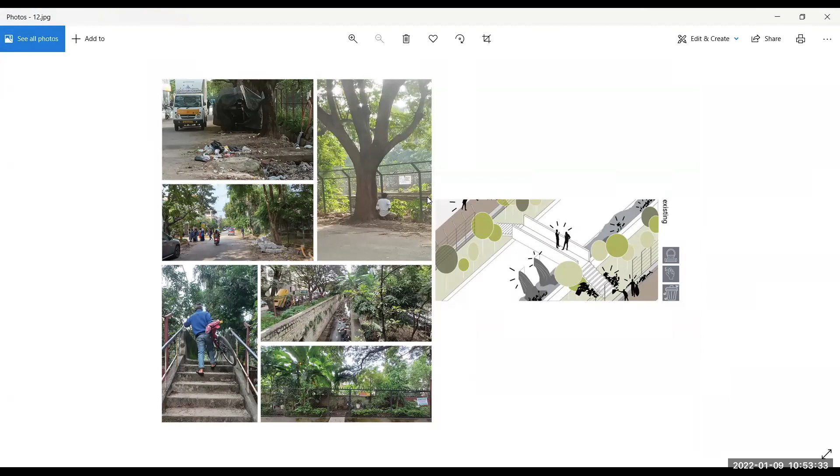So what we propose is a framework of interventions which aim for a social, ecological, and safe eighth main.

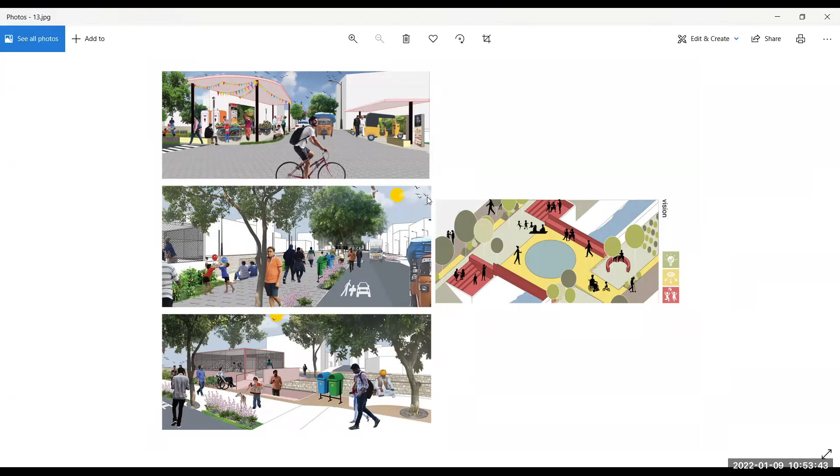We catalog the interventions under three headings: a socially vibrant, inclusive, and recreational spine; an ecological and resilient spine; and a safe, clean, and organized spine.

Each of these proposals is listed through the time taken for setting them up, the cost for setting them up, and the maintenance required for the proposal to function as a whole.

Under the first heading, we have a set of proposals which aim for a socially inclusive and recreational spine. These align with SDGs 3 and 11.

We present each of these sets of proposals in view of how they align with the Sustainable Development Goals of the UN.

What we thought was that a good place is created through habituation of the place.

Our first proposal is events like worldwide car-free events, which are being carried out in many places. These events can happen possibly once a week regularly, so a part of the street can be blocked off.

We can have residents of the surroundings take over the street and use it for their recreational purposes. Another set of events could be screening events.

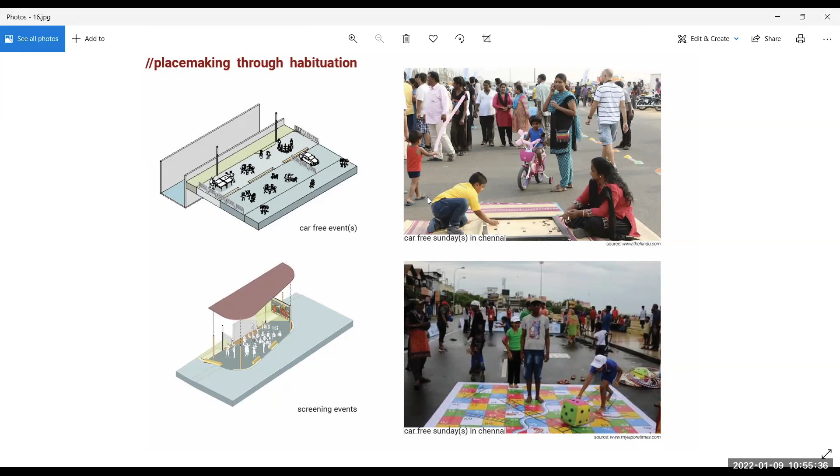Bangaloreans are huge RCB fanatics, so IPL screenings could take place, and other football Premier League matches could be screened too. Habituation is used as a tool for placemaking, and that's our first primary idea.

This is placemaking through social production. We preserve the buffer as such in our proposal, envisioning it as community gardens which can be used as a tool for social production. That's one main proposal.

What we observed during our initial site study was that the surroundings were slightly socially loose, so we use community gardens as a tool for improving the social cohesion of the neighborhood.

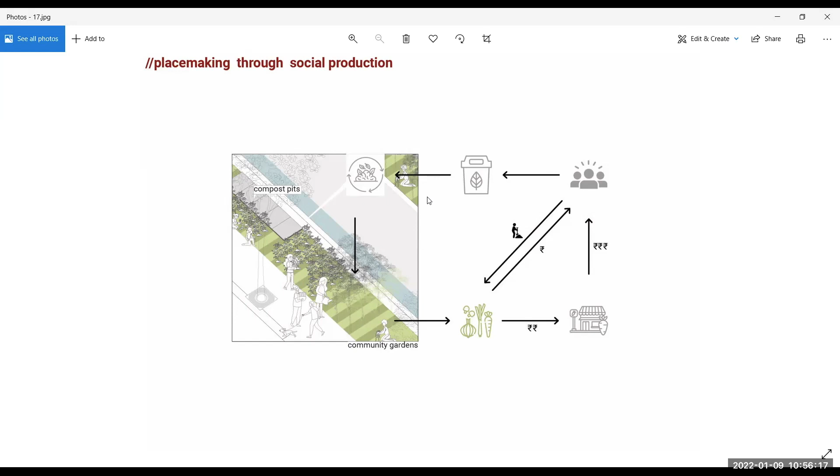Apart from that, people can also be engaged with food production, and the gap between urban areas and food production can be reduced.

One of our analysis parts was coming up with a safety map of the site, developed through on-site observations and community engagement, thanks to the organizers.

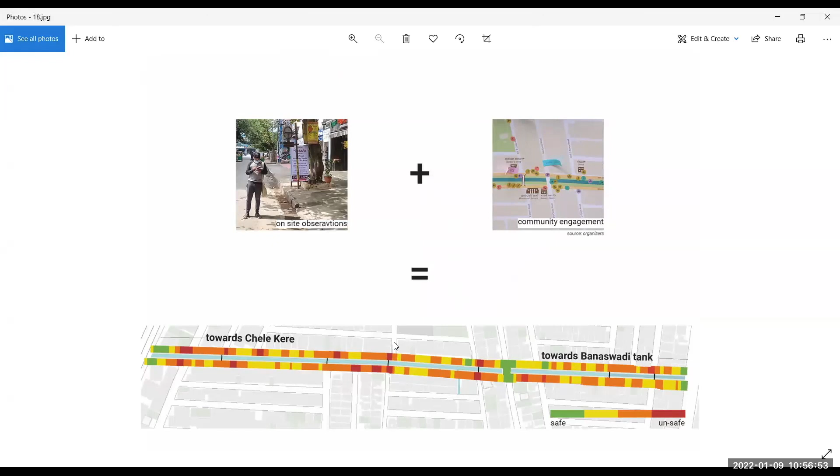Through these studies, we came up with a conclusion that these red spots, which are unsafe according to our map, turned out to be spots where the cross street and the eighth main meet.

These unsafe spots also include the pedestrian bridges which cut across the Raja Kaluve. So we intervened in these spots, doing surgical interventions.

First, we envisioned pocket parks along these junctions of the cross streets and the eighth main. These could be easily implementable, economical interventions, which are a first step towards space making in the surroundings.

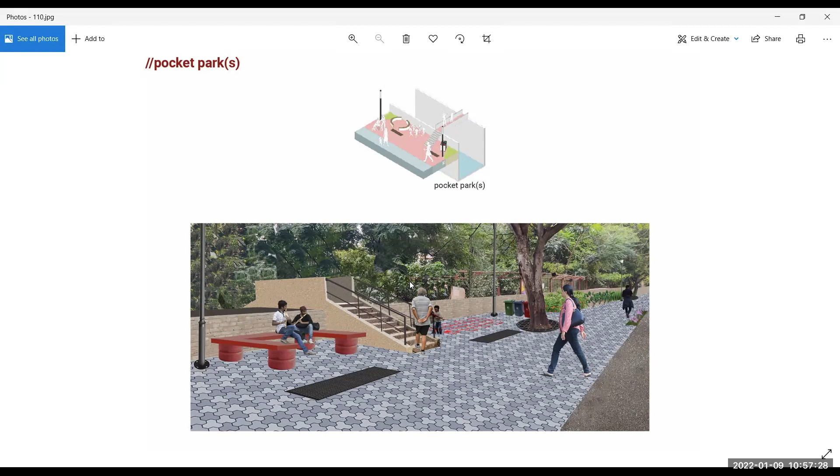This negates the negative character of the surrounding to a certain extent.

A more long-term and cost-intensive proposal was platforms for play. These are platforms which aim for inclusive recreation.

It has everyone in mind, so it is for each of the residents, each of the stakeholders.

To negate the negative character of the existing pedestrian bridges, we expanded the area of the pedestrian bridges to make it a place for the people, and we pushed them down to ground level so it's easily accessible by the neighborhood.

This is a view of one of the play platforms.

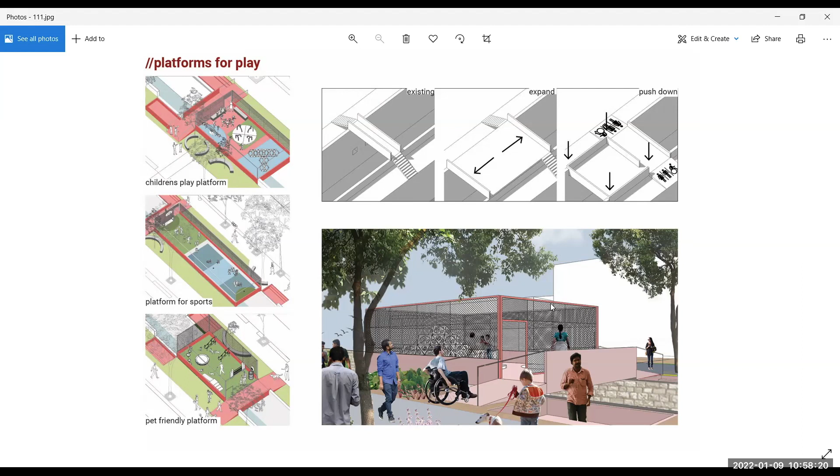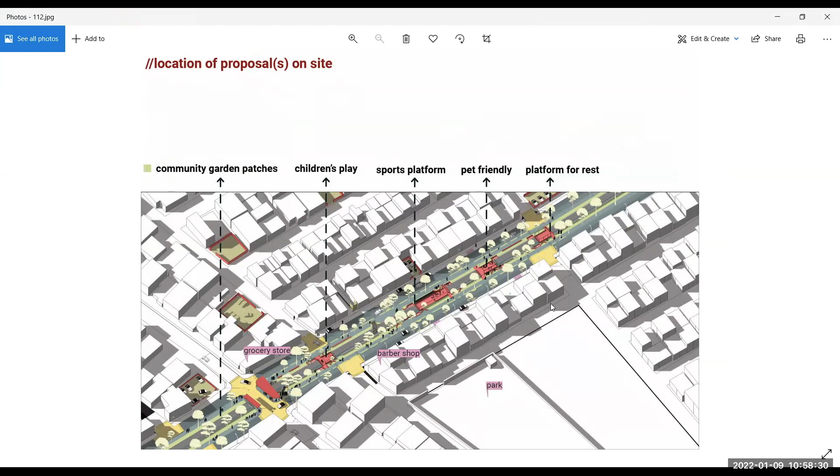Another proposal was a framework for an elastic eighth main. This reflects the temporal character of the pedestrians which was observed. There is not a constant flow of pedestrians; there are peaks of pedestrian activity during different times of the day. So the proposed road section reclaims a part of the existing carriageway.

During the peak pedestrian hours, residents can take over the street, so they can use that part of the road. Whereas during normal usage, vehicular movement dominates.

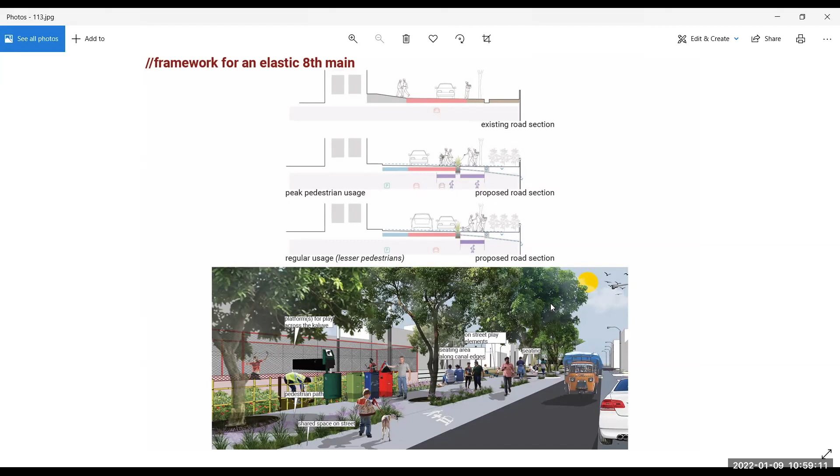These are proposals for an ecological and resilient spine. These align with SDG 6 and 15.

Our first proposal is retrofitting the canal. One major complaint from the residents was the canal being a constant discharge of sewage, so we used a set of nature-based solutions which remediated these issues.

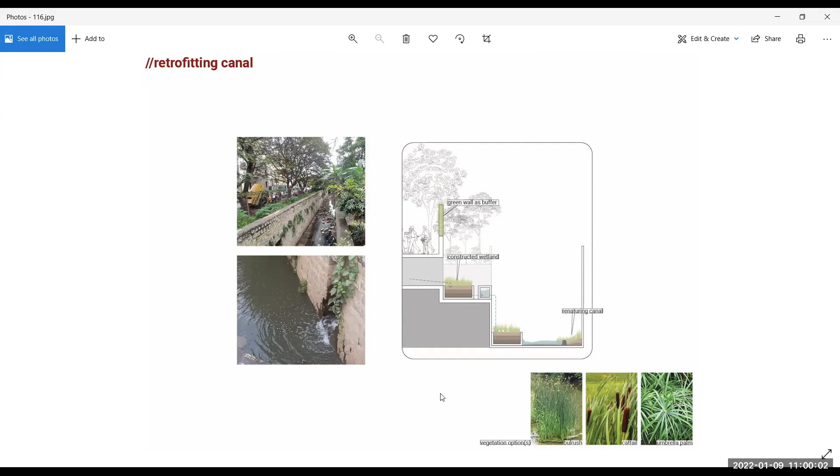This is a particular part in the detailed site where we are using a kind of stepped wetland to actually filter the incoming grey water. These are certain vegetation options for the wetlands. So next was retrofitting the stormwater drains.

These aimed at two things: one is retrofitting the stormwater drains in the cross streets, which were ill-maintained, and also retrofitting along the 8th main. So these provide proper access ways for stormwater drains to actually reach the Raja Kalve.

One issue which always happens is non-point source pollution with stormwater. Retrofitting them with bioswales helps in remediating this. Using native species of plants helps in long-lasting and low-maintenance bioswales.

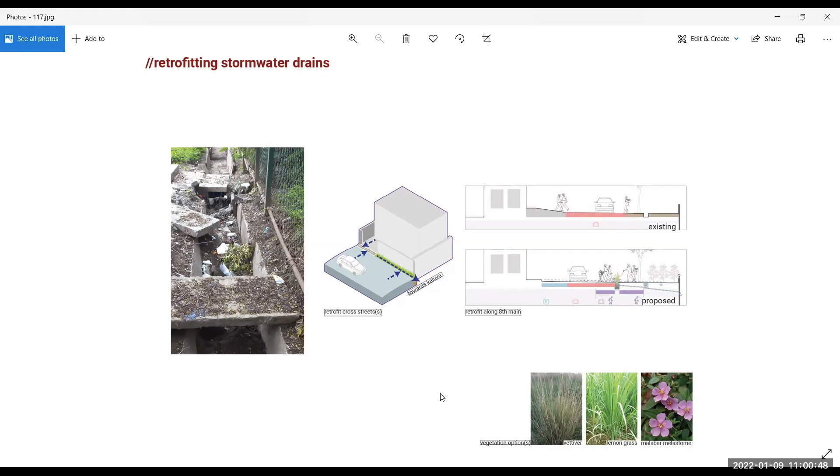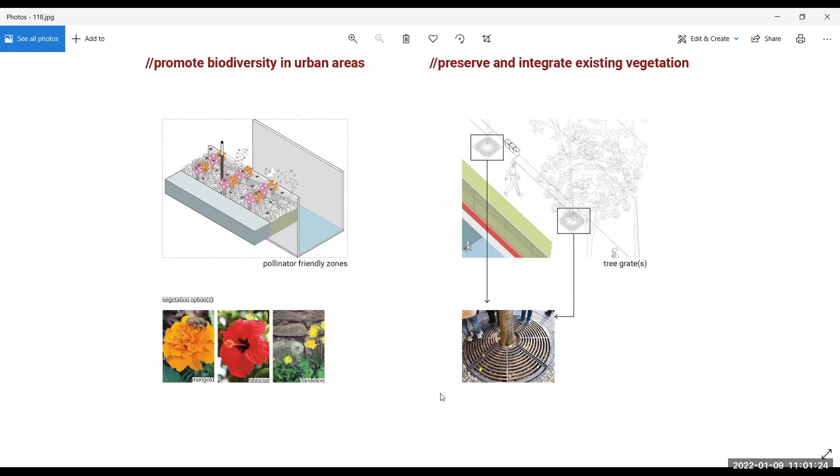Bangalore, and the Bangalore city area, is one victim of rapid urbanization. So to tackle that and promote biodiversity in urban areas, one of the proposals was a pollinator-friendly zone along the buffer area adjoining the Raja Kalve, and preserving and integrating the existing vegetation along with the larger frame of the proposal is another aim.

The locations of proposals. So the last set of proposals is towards a safe, clean, and organized spine, and these align with a certain set of SDGs: 3, 11, and 6.

One major stakeholder to be considered in retrofitting the Banaswadi site was the street vendors. Street vendors basically work on the basis of visual and access immediacy, so zoning them in the junction next to the grocery store was one proposal.

Retrofitting the junction to help provide them with proper vending spaces, and also accommodating the auto rickshaw stand, was one major proposal.

Vending doesn't happen throughout the day; it's a temporal activity. So giving provisions for accommodating other events post vending hours was also a major proposal.

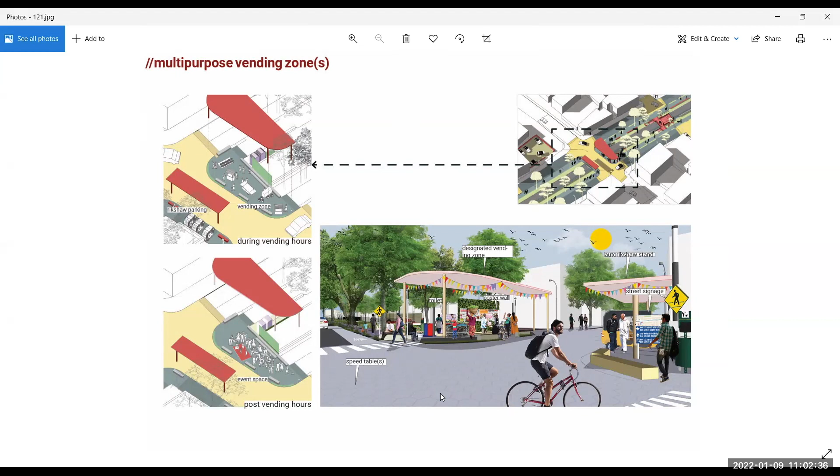Another issue was high speed of traffic in the 8th main, so we used certain traffic calming elements. We used speed tables at the cross street and 8th main junctions, and bulb-outs along the 8th main road, which helps to a certain extent in reducing the high speed of traffic.

All of the cross streets and 8th main junctions were retrofitted with proper segregated waste collection provisions. So apart from having the usual set of waste bins, there are also specific bins which accommodate pet waste. So that's one thing.

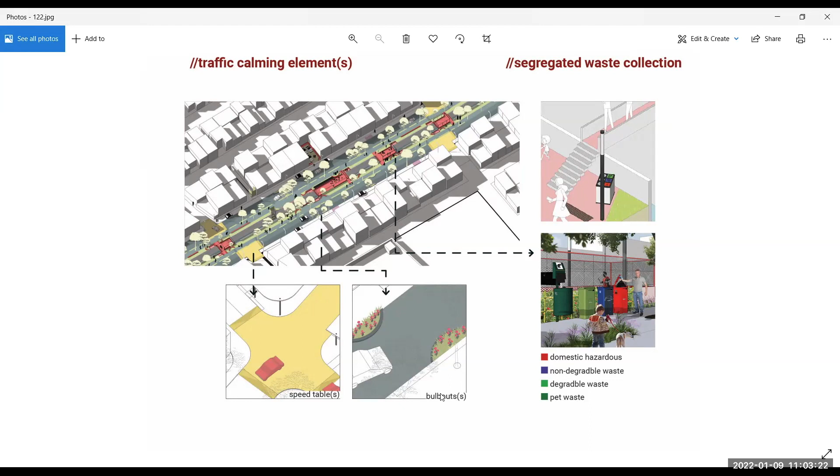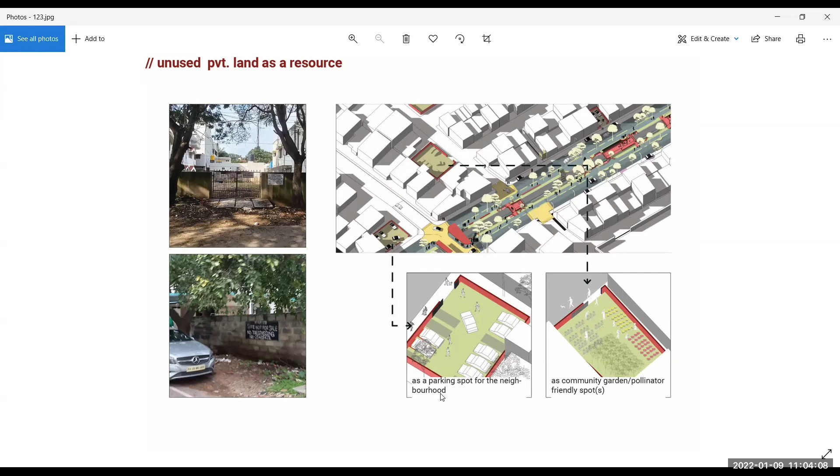Your time is nearly up. I would request... that's it.